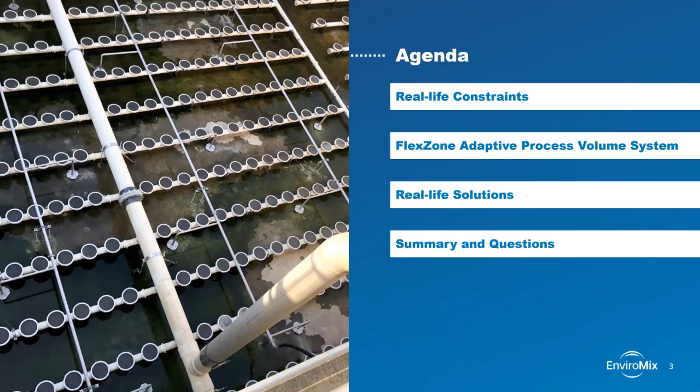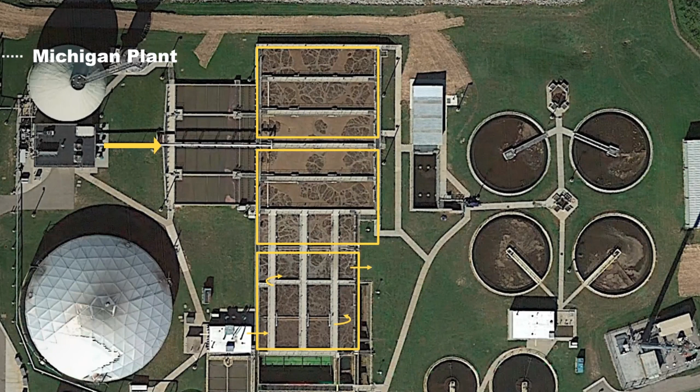Our first plant today is in Michigan. This plant is a nitrification plant targeting an effluent ammonia of 1 milligram per liter. The influent enters the primary clarifiers before being split between 3 parallel activated sludge trains, each consisting of 3 passes. Note that the expansion over the years has resulted in different aeration basin sizes.

The facility is designed and permitted for 10 MGD. However, it typically only receives between 5 and 6 MGD. The aeration system and blowers, as they should be, are designed at the 10 MGD load. However, operating at nearly half of the design with the inability to take a train out of service results in excess capacity.

This extra capacity results in excessive aeration and high dissolved oxygen concentrations in the aeration tank. This not only consumes unnecessary energy, but also can cause them issues with settling. During nitrification in plants with excess air and no ability to denitrify, alkalinity is depleted, pH drops, and nitrification rates tend to drop. And this impacts effluent quality.

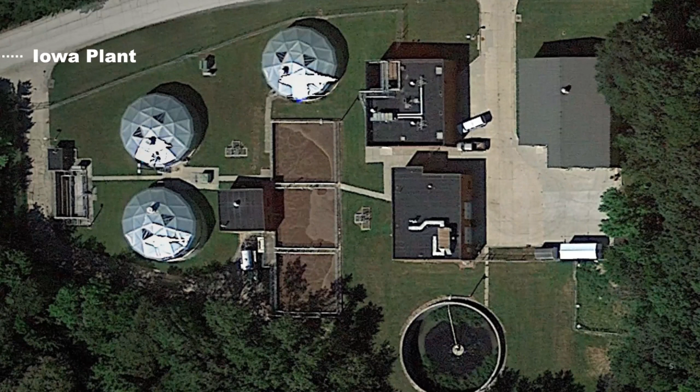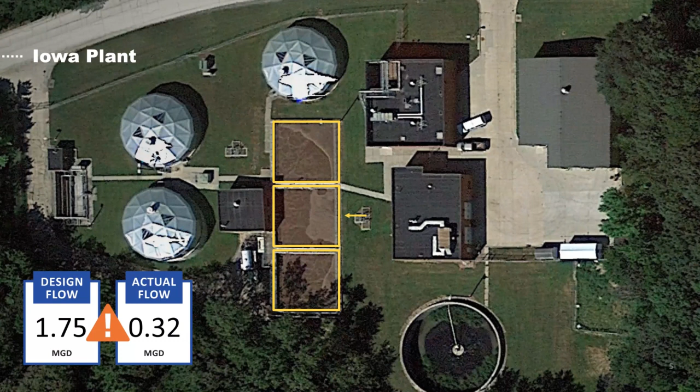The second plant that we will look at is in Iowa. This plant is currently a nitrification-only plant with 3 parallel trains in operation. This facility is designed for 1.75 MGD. However, it typically operates closer to 0.3 MGD at minimum flow conditions. During these low flow rates, they will take 1 train out of service, but they need to keep 2 trains online to handle the high flows that they receive during rain and snow melts.

At times, this plant sees dissolved oxygen concentrations upwards of 5 milligrams per liter, which can result in excess energy consumption. The plant is currently approaching a new permitting phase that will include a total nitrogen limit of 15 milligrams per liter. The construction plans include adding an anoxic selector with internal recycle pumps. However, the high DO concentrations that they're currently seeing in the aeration tanks must be reduced in order for the denitrification process to work as it's intended.

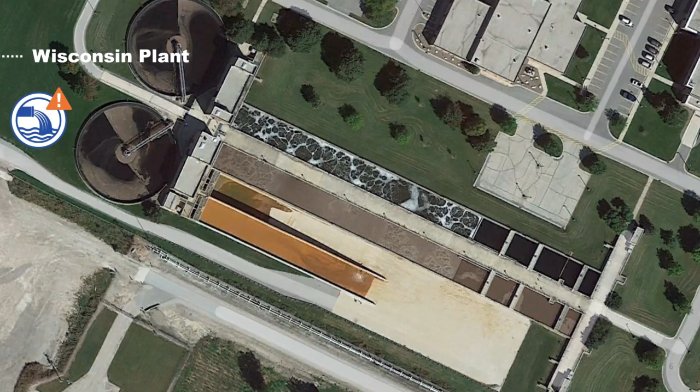Our third plant today is a larger facility located in Wisconsin. This facility is looking at ways to modify operations to meet future nitrogen and phosphorus limits without additional tank volume. They have the benefit of having 2 treatment trains shown here that accept a fraction of the total flow to the plant, and they can operate them in parallel to compare operation and treatment objectives while evaluating a number of different scenarios.

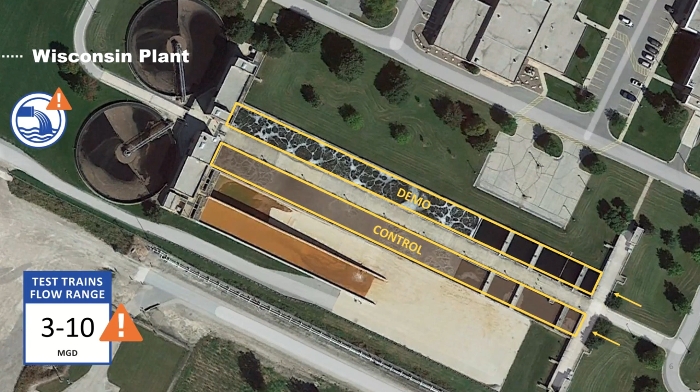Both of these trains operate in an AO configuration with an anaerobic zone upstream of a long, narrow aeration train. The bottom train will be used as a control train, while the top train will be the demonstration train. This pair of trains will receive flows ranging from 3 to 10 MGD.

This plant has a desire to operate at low dissolved oxygen concentrations to utilize embedded carbon to promote simultaneous nitrification and denitrification. Under low DO operation, it's likely that the airflows would fall below the minimum airflow rate per diffuser and the mixing limited thresholds. Additionally, the plant wants to protect the anaerobic selectors from residual DO and nitrates that are oftentimes found in the return activated sludge lines.

Now, to introduce the FlexZone Adaptive Process Volume System, the solution for overcoming the constraints faced by nearly all conventional activated sludge plants. So, what is FlexZone and how does it work?

Well, the FlexZone system is a subset or fraction of an aeration train that is strategically sized and located upstream of a dedicated aerobic volume. At 20-year design conditions, the volume that's occupied by both the FlexZone and the dedicated aerobic volume is the tank volume that's needed for the aerobic capacity. There is no additional tank volume. You will see that we are just utilizing the existing volume in a unique way whenever the conditions are not at this 20-year minimum temperature design.

The FlexZone is designed specifically around changing conditions to optimize energy efficiency and process stability. The FlexZone includes a select number of independently controlled zones. In this example, there are 4 subzones within the FlexZone. Each subzone contains both diffused aeration and BioMx compressed gas mixing. And each subzone can operate as mixing only, aeration only, or simultaneous mixing and aeration.

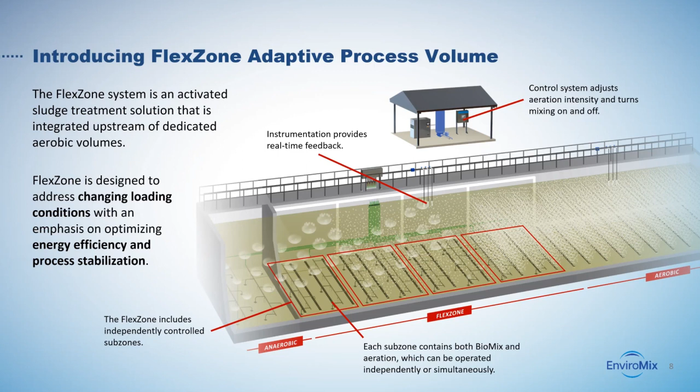Online instrumentation, located both within the FlexZone and the dedicated aerobic zone, is used to provide feedback for the control system, which adjusts the aeration intensity and turns mixing and aeration on and off. Upon first glance, it's easy to confuse the FlexZone with a traditional swing zone. However, I personally feel that there are a few key limitations of a swing zone. First, a swing zone is typically just a single zone, or in rare cases, 2 discrete zones in series.

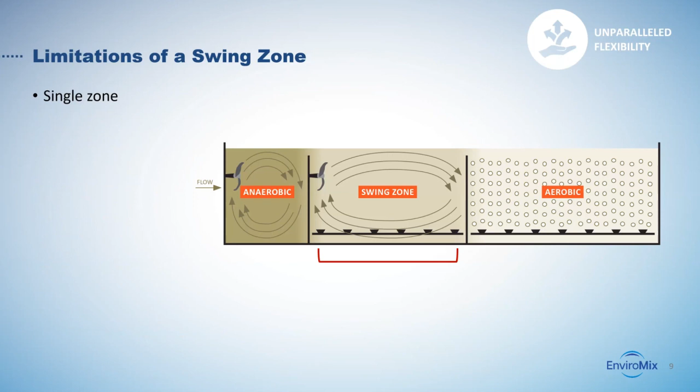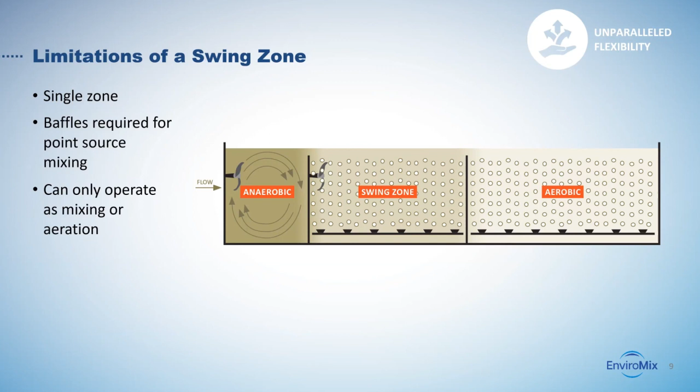Second, a swing zone requires baffle walls if any type of mechanical mixing device is being used. The baffles are needed to overcome the limitations of point source mixing, which direct the motion of the liquid to keep the solids in suspension. Next, a swing zone can only operate as either mixing or aeration, on or off. And it cannot typically operate mixing and aeration simultaneously.

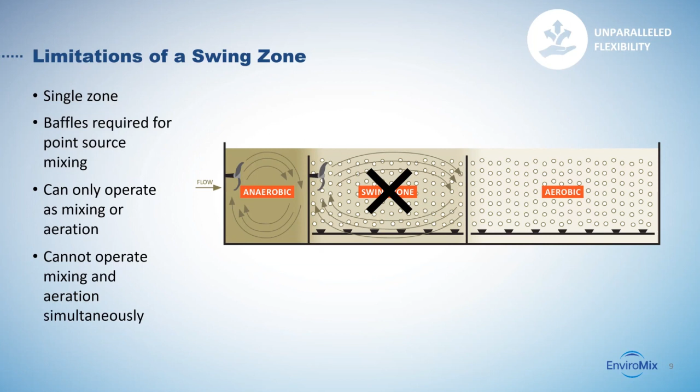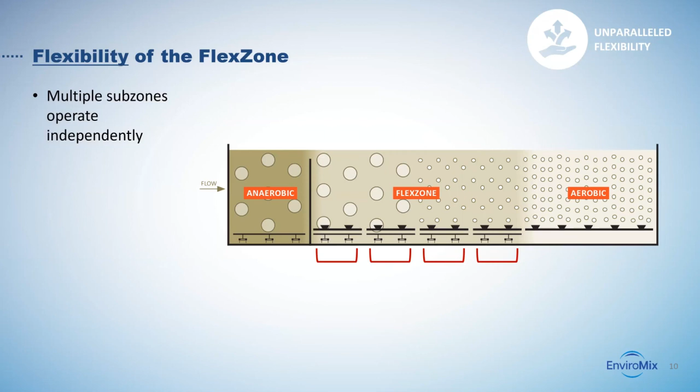My colleagues often hear me comparing a swing zone to a digital signal. It's non-continuous or discrete, A or B, mixing or aerating. However, a FlexZone offers a smooth, continuous analog signal by comparison. A FlexZone consists of multiple subzones, which can each be operated independently. It also requires no baffle walls.

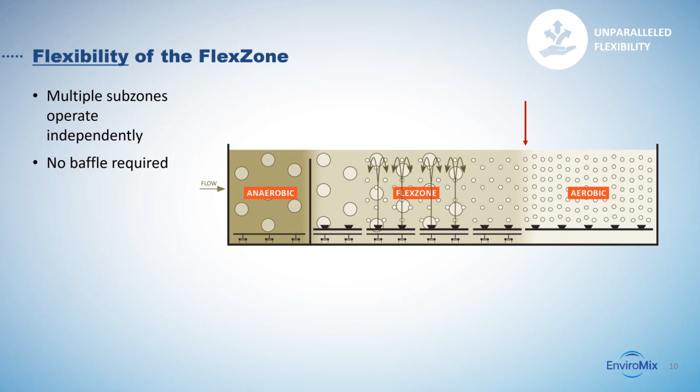The unique bottom-up mixing technology of BioMix allows for this, combining complementary mixing patterns of diffused aeration and compressed gas mixing. The FlexZone provides the ideal combination of equipment for concurrent aeration and mixing operation, which is distinctly different from the aeration and mixing equipment used in traditional swing zones, which cannot operate simultaneously. We call this concurrent operation SyncroMix.

SyncroMix also enables us to infinitely adjust the aeration intensity up and down to match the demand. When aeration in any subzone is turned down below the mixing limited thresholds, the mixing system is automatically enabled so that the aeration can turn down even more. And when aeration is no longer needed, the FlexZone allows for aeration to be suspended completely in one or more subzones. And it's brilliant if I do say so myself. The flexibility just allows a plant to be free from the constraints that they are used to, to be able to freely adjust the system up and down based on the changing conditions.

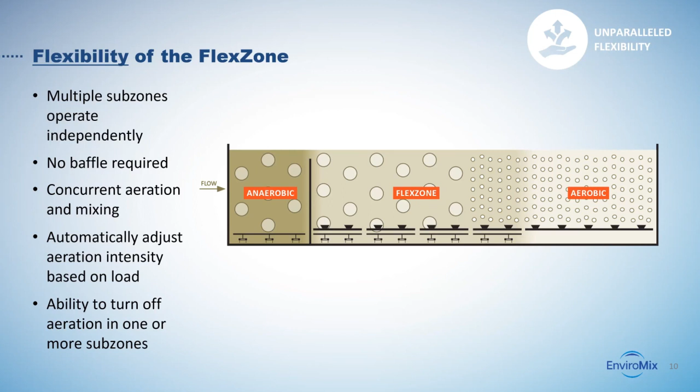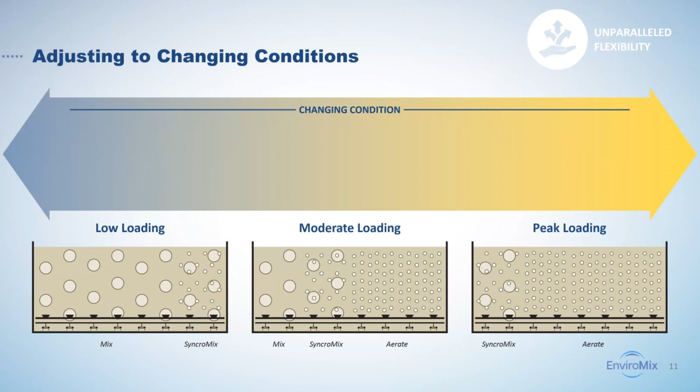So what are the changing conditions that would constitute the need to alter between low loading and peak loading conditions? Well, they are conditions that most plants that I have been to experience. First, there's the oftentimes dramatic difference between the loading that the plant experiences at startup compared to the 20 or 30-year design loading that is predicted for the future. This change is typically slow and experienced over long periods of time, resulting in years of constrained operations.

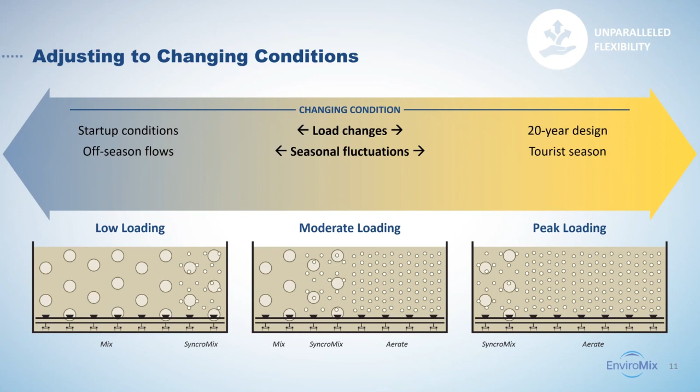Seasonal fluctuations are another condition that some plants experience. Many tourist towns experience high periods of demand, followed by much lower off-season flows. Closely related to seasonal fluctuations are temperature variations. Many regions, especially those of us up in the north, require an increased aerobic mass or volume as the water temperature declines, and a subsequent need for less aerobic mass or volume when temperatures increase.

The final condition that I want to point out is diurnal fluctuations. These changes happen regularly over the course of a day and are especially dramatic or impactful for municipal plants with smaller collection systems. In the middle of the night, the flow and loading can be radically different compared to the peak of the day. The scenarios shown on the bottom here illustrate just one example of how this specific FlexZone can respond to changing conditions.

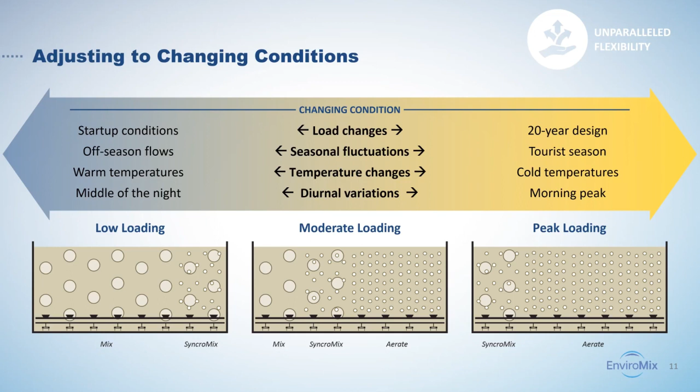So what is this carbon management and embedded carbon that we keep talking about? I've heard these terms in the industry a lot more lately. Carbon management is the concept that wastewater influent is abundant in carbon like COD or BOD. And that carbon can be redirected and utilized throughout the plant for beneficial use. Carbon can be used to improve denitrification and to enhance biological phosphorus removal.

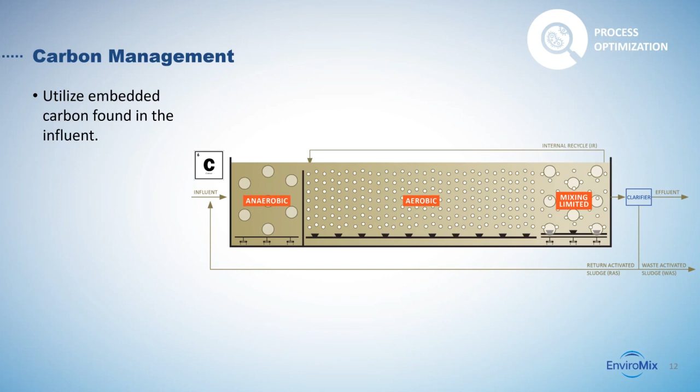Carbon management is the reason why all these examples you have seen so far may have seemed flipped on their head. When engineers are trying to account for low oxygen demand at the end of an aeration basin, they may often include supplemental mixing at the back end of the aeration basin. But at the end of the aeration basin, all the carbon has already been chewed up, and a lot of aeration energy was used in the process. Efficient use of embedded carbon includes a strategy on controlling or varying the biological reactor environments to improve biological nutrient removal before the carbon is consumed.

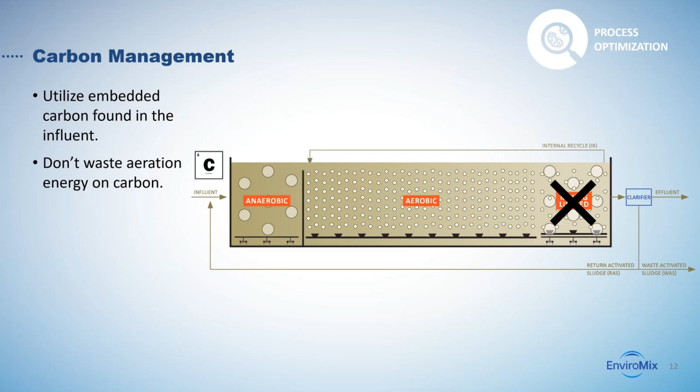In the example shown here, the flex zone with decoupled mixing and aeration equipment capitalizes on redirecting influent carbon in a low DO environment for simultaneous nitrification and denitrification, thus reducing the overall oxygen demand while protecting against recycled nitrate to the anaerobic zone.

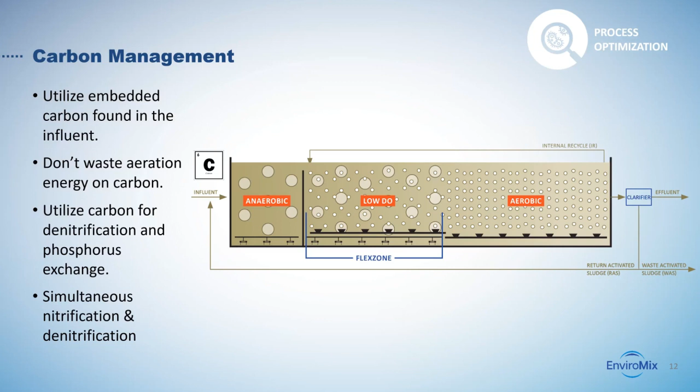So what's included in the flex zone offering? The flex zone is a complete solution, including aeration, mixing, instrumentation, and controls, along with the design of the system. The flex zone is agnostic to process configurations and can enhance the performance of all process designs, anything from a nitrification-only plant, MLE, AO, Bardenpho, just as a few examples.

The solution includes a process design, which defines the volumetric requirement for the flex zone and the number of subzones along with the aeration and the mixing equipment needs. A plant can utilize an existing low-pressure air supply, or EnviroMix can size and provide process blowers.

BioMix is interlaced with the aeration grids to provide mixing as needed. The aeration grids must coincide with the BioMix grids to define the individual subzones. Existing grids can be modified with additional drop legs, or new grids can be supplied.

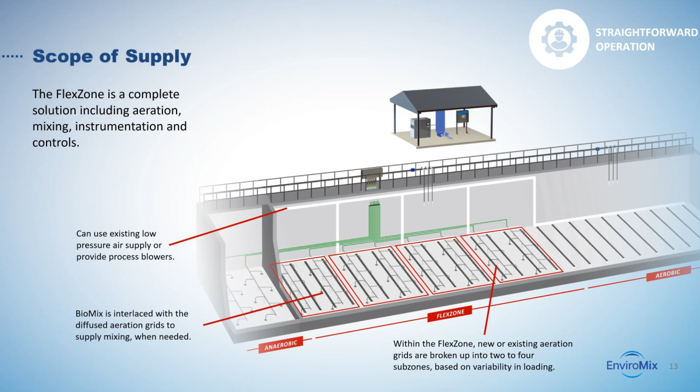Modulating valves, airflow meters, and process instrumentation such as DO are provided within the flex zone and a dedicated aerobic zone to provide online feedback for the control philosophy that is contained within the master control panel. The control system is responsible for modifying the aeration intensity and turning on and off both the mixing and the aeration systems, while keeping the aeration efficiency and energy consumption front of mind.

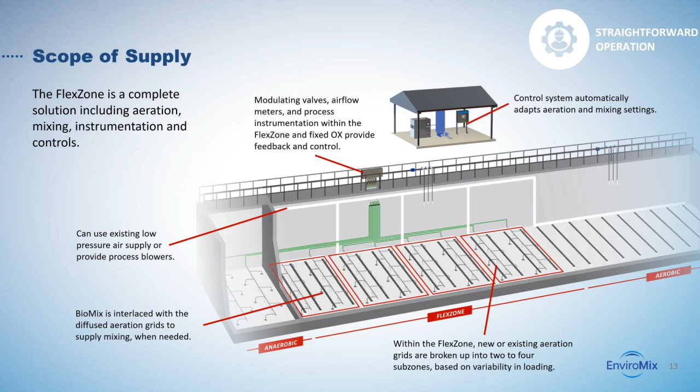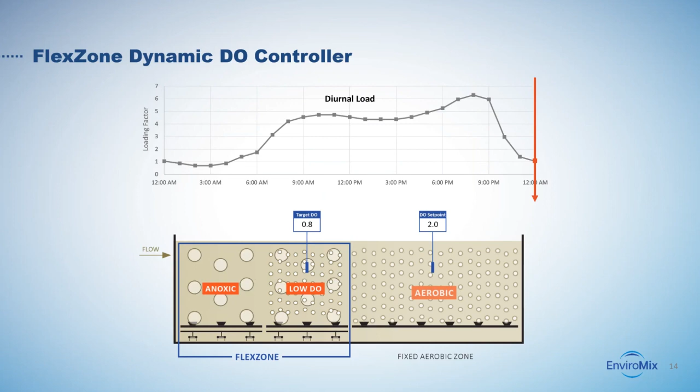Now, let's get back to those projects that we discussed at the start of this webinar. I will present each one individually and show you the FlexZone solution that each plant is currently constructing. If you recall, the plant in Michigan had a number of constraints that they were looking to overcome. The plant is currently operating at about half of its design flow, but it's unable to reduce the aerobic volume in operation, which results in high DO concentrations in the aeration basins. This leads to higher energy costs than preferred and challenges with alkalinity consumption and settling.

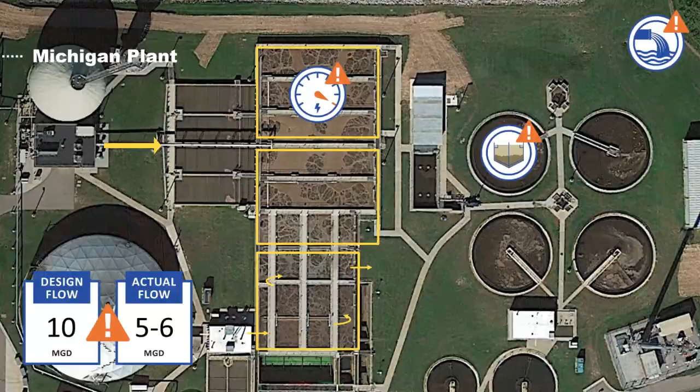As illustrated with arrows on the bottom image, each aeration train is 3 passes. As we talk through the solution, we've extended those 3 passes out horizontally and depicted it as a single long aeration train. The FlexZone in this project was strategically placed in the middle pass of each of these aeration trains. So the first pass remained aeration only, and the last pass remained aeration only.

EnviroMix worked closely with the consultant and the plant to create a design that resulted in the least amount of change to the existing equipment to ensure a quick installation timeline and most efficient use of the funds that they had available.

The FlexZone is divided up into 3 subzones, each of which can be independently controlled with its own mixing grid and aeration grid with automated valves. The aeration grids are all existing, and the only required change was to swap out the ceramic diffusers for membrane diffusers within the FlexZone.

The subzones will operate as mix only the majority of the time. This will provide a volume within the tank to denitrify, resulting in alkalinity recovery, oxygen credit, and energy savings. However, during winter months, when the water temperatures drop in Michigan, the plant will require more aerobic mass or volume, and as such, the FlexZone will adapt to provide 1 or even more aerobic zones to ensure complete nitrification.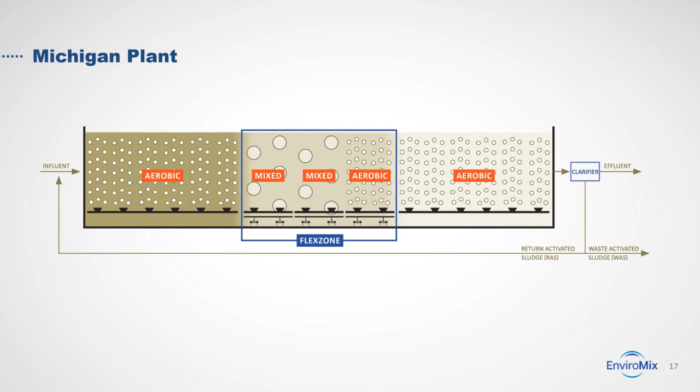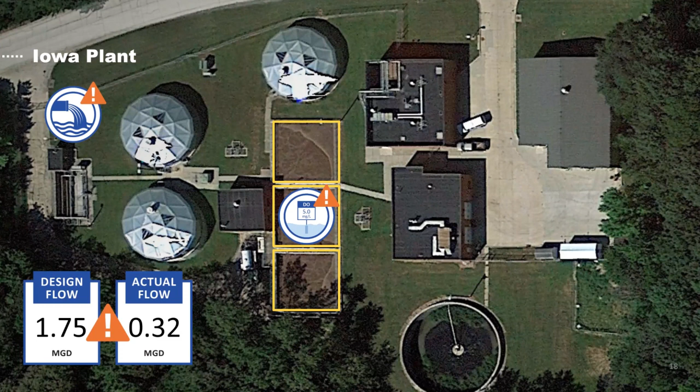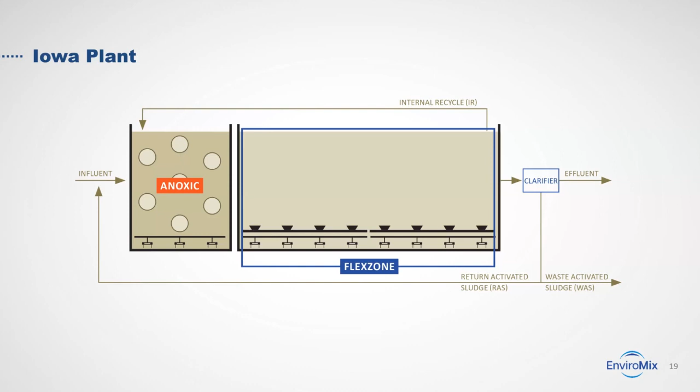The resulting design included compressed gas mixing in the anoxic selectors, and then dividing up each of those square aeration tanks into 2 subzones, each one equipped with both mixing and aeration equipment. When matching the oxygen supply to the oxygen demand, the reactors have unlimited aeration turndown capability. The plant can operate one subzone with only aeration and the other with both mixing and aeration, or they can operate both subzones with both mixing and aeration.

The status of the mixing being on or off will be controlled by the master control panel provided by Enviromix, which will modulate the automated valves to the process trains and also call for more or less air from the blower system. When the control system identifies mixing limited conditions, the mixing equipment will be activated. This control strategy will ensure that the anoxic environment is protected from high DO return streams, and will allow the operations and maintenance staff to focus their attention away from any manual adjustments to this process and on to more important and pressing matters that they may have at the facility.

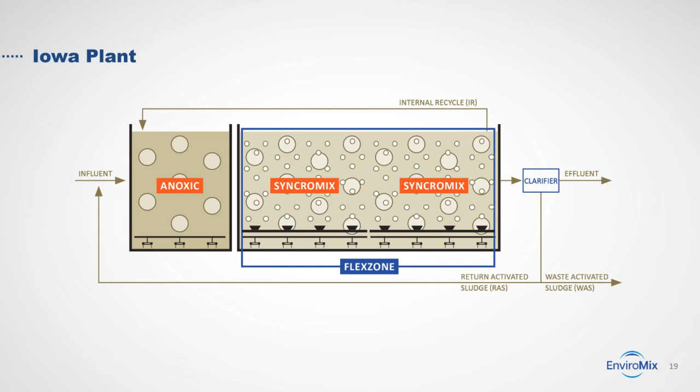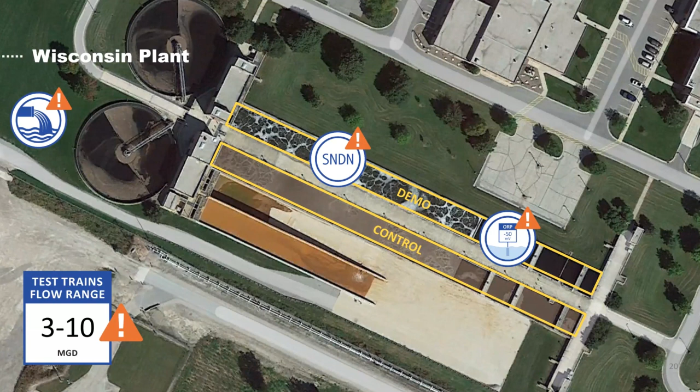And last, but certainly not least, we return to the Wisconsin plant. If you recall, this plant was running a demonstration comparison on 2 parallel trains. The evaluation will support in identifying a way to meet future nitrogen and phosphorus permits utilizing the existing infrastructure. Enviromix is pleased to be partnering with the plant and their consultant of record to complete this expected 2-year evaluation.

During the first phase of testing, the focus will be operating the flex zone in low DO environments to facilitate simultaneous nitrification and denitrification. Operating in this fashion will ensure efficient use of the embedded carbon that's coming into the influent, while providing denitrification to protect that anaerobic zone from high nitrates in the RAS stream. The aerobic volume will be expanded during high loading periods by increasing aeration capacity to 1, 2, or even more of the subzones, ensuring that nitrification and BOD removal is not impacted at peak load.

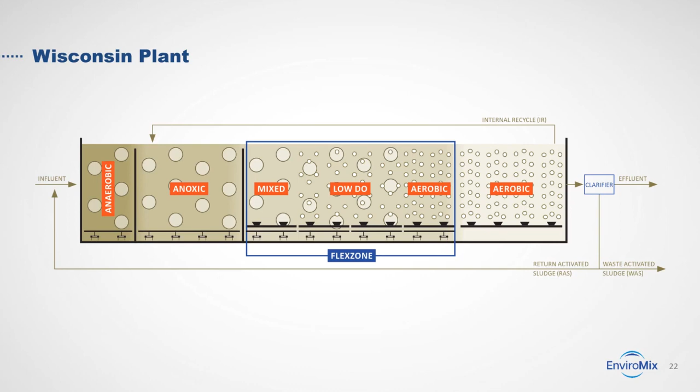I hope that you enjoyed this presentation and have thought of at least one example where FlexZone can benefit your plant or a plant you are designing or upgrading. We just covered a lot of material, so how about if I summarize before I open it up for questions?

When we think about overcoming the constraints of conventional activated sludge, it's important to focus on a few themes that we identified between these three plants. Of course, there are always going to be attributes that are unique to each facility or application, but let's just start with the basics of what to look for.

The FlexZone system is ideal for plants struggling with constraints such as aeration and blower control limitations, whether that be the inability to turn off existing aeration grids or tanks or limited aeration turndown. The FlexZone is ideal for plants struggling with nutrient removal and carbon utilization, whether that be with future tighter limits coming up or struggling to protect the integrity of anaerobic or anoxic zones.

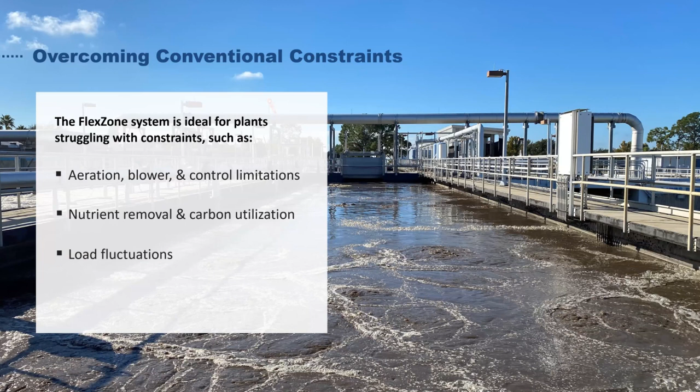The FlexZone is perfectly suited for plants with constraints such as load fluctuations, whether that be startup versus design, seasonal changes, or diurnal peaks and troughs. And the FlexZone is ideal for plants struggling to manage all of the above within their existing infrastructure limitations.

The FlexZone overcomes these constraints by providing multiple independent subzones that allow for concurrent aeration and mixing, therefore eliminating mixing limited conditions. The system provides responsive process environments within each of these subzones that can be operated as aerobic, anoxic, or low DO environments, utilizing that embedded carbon more effectively and efficiently. FlexZone also provides dynamic automation and controls to quickly adapt to changing load conditions.

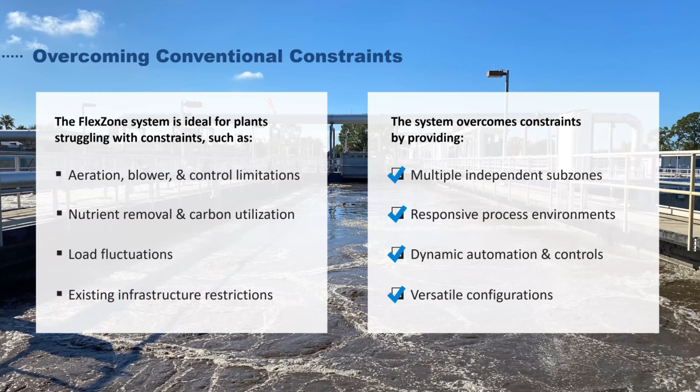And finally, FlexZone provides versatile configurations with independent mixing and aeration designed around existing tank and diffuser grid layouts and working with existing blower configurations when possible. The FlexZone also provides versatility in new construction design, especially when considering how to design for the needs of tomorrow while addressing the constraints of today.